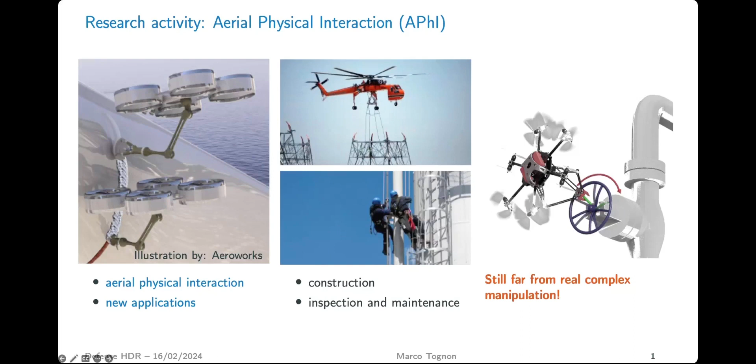So this field started about, let's say, 10 years ago, with the ambition of opening the door to new applications that require physical work at high altitude, like, for example, construction, inspection and maintenance, and others. But despite the work that a lot of researchers have already done, the very promising results that we obtained, and also the appearance of some first commercial solutions, we are still far from having aerial manipulators able to perform complex manipulation tasks in real environments.

But why is there still this gap between what an aerial manipulator can do and what a ground manipulator can do, which has been able to perform complex manipulation tasks for many years? Well, the very first source of challenges is the type of base. In fact, a ground manipulator is fixed to the ground, while on an aerial manipulator, the arm is attached to a floating base system, which is much more difficult to control.

Let's make an example. As soon as the arm moves, because of some dynamic reaction, there are some torques and forces that are applied to the base of the system. In a grounded manipulator, those forces and torques are passively, directly compensated by the reaction forces of the ground. While on an aerial manipulator, those reaction forces need to be actively compensated by the floating base. And this is very similar when the robot gets into interaction with the environment, so there are interaction forces applied to the end effector.

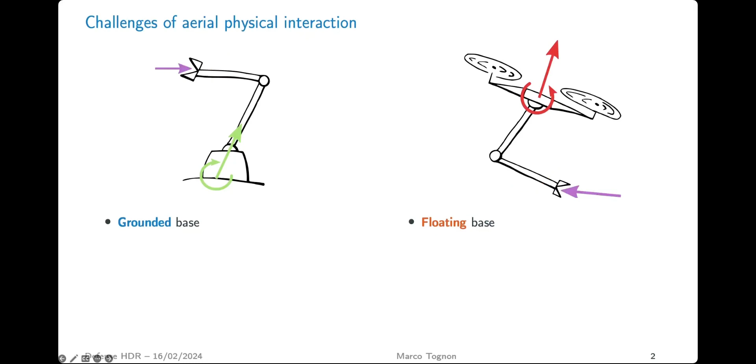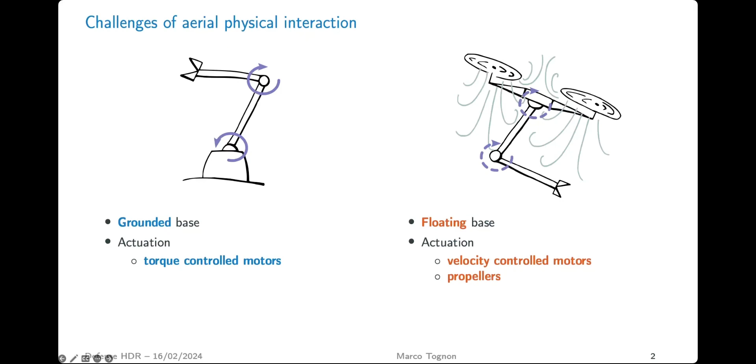The second source of complexity is the type of actuation. Grounded manipulators are normally controlled by very accurate torque-controlled motors. On the other side, on an aerial manipulator, we normally see inaccurate servo motors to control the arm, to make the arm lightweight. But not only this, the aerial platform itself is actuated by propellers that generate forces pushing the air. But due to turbulence and very complex aerodynamic effects that are difficult to model, the precise control of the force produced by propellers is very challenging.

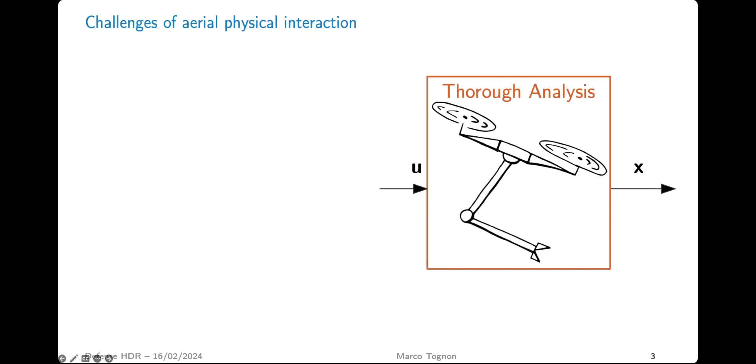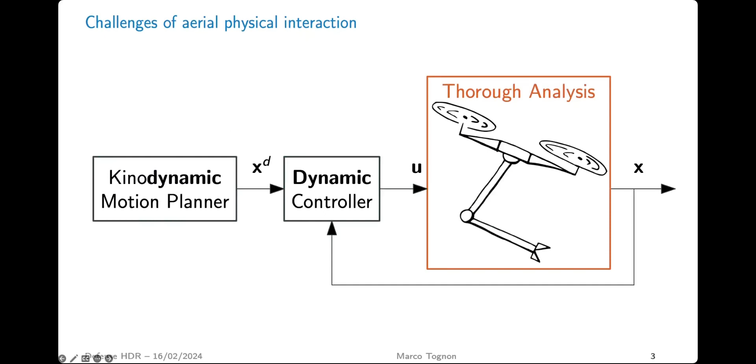Therefore, to address all these problems, I believe that a very deep and formal analysis of the dynamic properties and capabilities of those systems is required, to then be able to design new dynamic controllers and motion planners that can really perform well for physical interaction.

So my journey in the realm of aerial physical interaction started quite some time ago during my internship at the Max Planck Institute, where I first started working in robotics. There, fascinated by this domain, I decided to start a PhD at LAAS under the supervision of Dr. Franchi and Dr. Cortés. And at the end of this, I decided to stay at LAAS for another year and a half, more or less, to finalize some works, start new works through collaborations, and also some independent work. And also to improve my management skills, I stayed to be the technical leader of the LAAS team for the robotic challenge MBZIRC.

At the end of this, I moved to ETH Zurich in the ASL group, where I was the leader of the micro aerial vehicle team. And finally, in November 2022, I got a permanent position here at INRIA as an INRIA researcher within the Rainbow team.

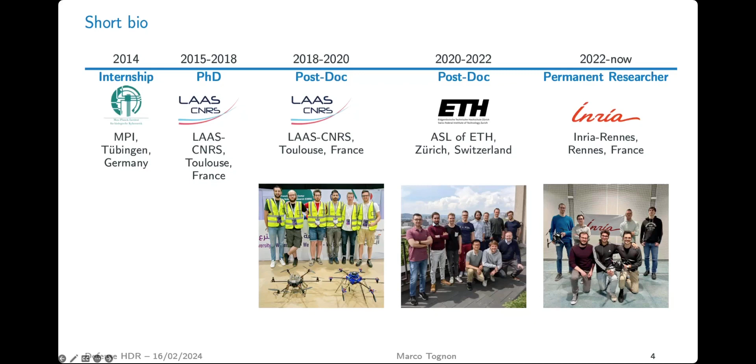So to start my journey, at the beginning of my PhD, aerial physical interaction was not that advanced, or actually the question was still if aerial physical interaction was even possible. That's why during my PhD, I started analyzing systems with always increasing complexity, starting with simple aerial manipulators with a passive link, like cables or bars, to then move to active links, where there are active manipulators mounted on either under-actuated or fully actuated aerial vehicles.

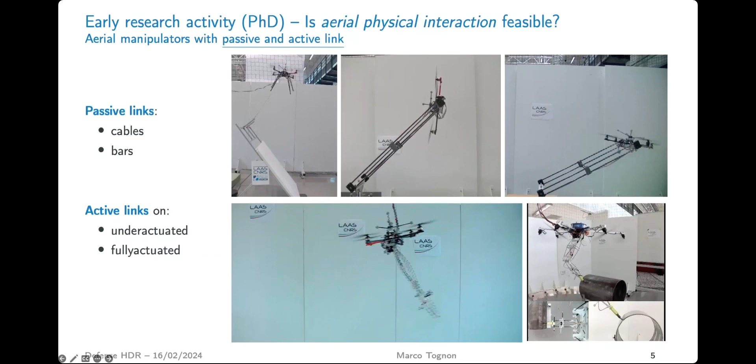So those preliminary results, let's say, were able to show how an aerial robot can actually interact physically with the environment. And thanks to those results, and of course all the work of other colleagues, I will say that after my PhD, the community managed to show the feasibility of aerial physical interaction, but mostly in indoor environments using motion capture systems, in very structured environments where the modeling is known, and also for very simple tasks like pick and place, or at best what we call push and slide on static surfaces.

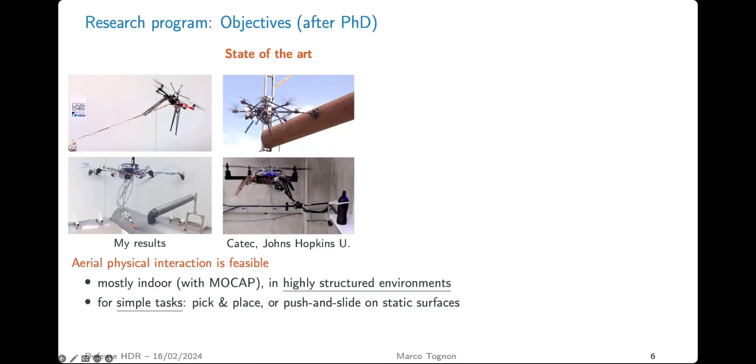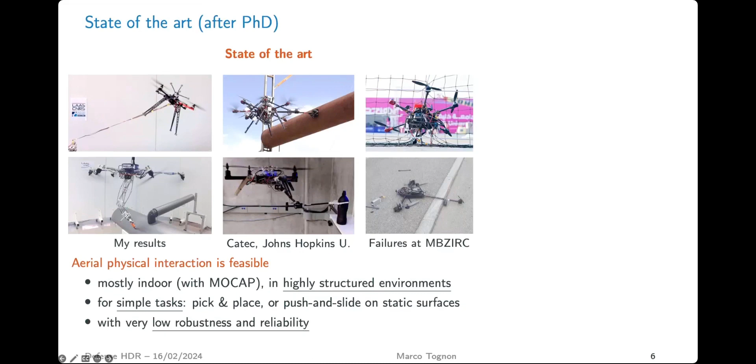But even in those very simplified conditions, as soon as there is additional sensor noise, disturbances, or uncertainties in the environment, performance and robustness can decrease drastically, often leading to the failure of the system, as we saw many times during the robotic challenge MBZIRC.

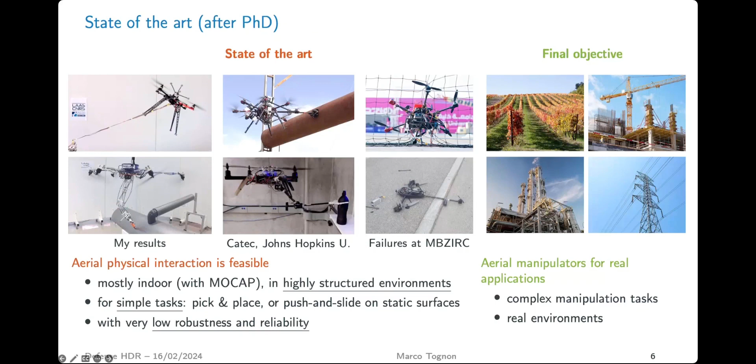Therefore, I believe we are still quite far from having real aerial manipulators that can perform complex tasks in a real environment. This is why at the end of my PhD, I basically took this as a main driving motivation and goal, which is designing aerial manipulators that can perform complex tasks, for example for precision agriculture, construction, inspection and maintenance, in real environments like oil and gas or power distribution plants.

But to reach this goal, there are still many gaps and challenges to be addressed. For example, considering single robot operation, aerial manipulators need to be very robust against uncertainties and disturbances, and able to not only interact with the static environment, but also with dynamic and articulated objects.

Although this is a must, for some applications it might not be enough. In fact, because of the complexity of some tasks, robots might need to collaborate with each other, so the task might require multiple robots to perform it, or even interaction with humans.

Therefore, my goal was to design aerial manipulators with enhanced aerial physical interaction capability to perform complex interaction tasks in uncertain and dynamic environments.

And to reach this goal, I started my investigation along three major axes of research. The first is precision, robustness, and safety of single robot operation. The second is the collaboration among multiple aerial manipulators. And finally, the third is the collaboration even with humans.

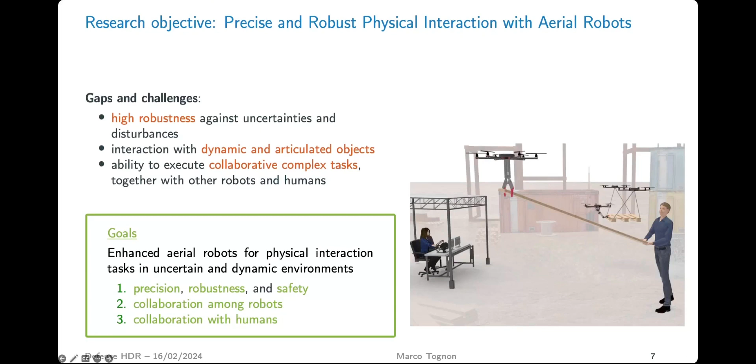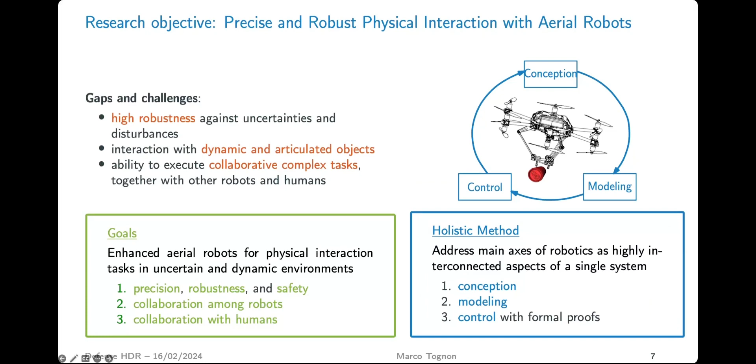To perform this research, I mainly based my work on what we call a holistic method, meaning that I try to address all the main axes of robotics not as independent modules, but rather as very interconnected aspects of a single system. Relying on my background, I mainly focus on the conception, modeling, and control of those systems, trying to provide a formal proof of stability and guarantees, but without completely neglecting the links with perception and motion planning. So the investigation of these three axes of research has been done in different ways along my career.

Specifically, the investigation about single robot operation has been done mainly at ETH Zurich, where I was leading the MAV team for this objective. On the other hand, the multi-robot aerial physical interaction investigation started at LAAS, also with Antonio, and then continued in collaboration with him and other researchers and students at LAAS and also University of Padua.

While the third research axis, about having aerial manipulators interacting with humans, was an investigation that I autonomously started, being really curious about the topic. So I independently started it at LAAS, and then instantiated it at ETH, where I also managed to get my own funding to continue this very interesting topic.

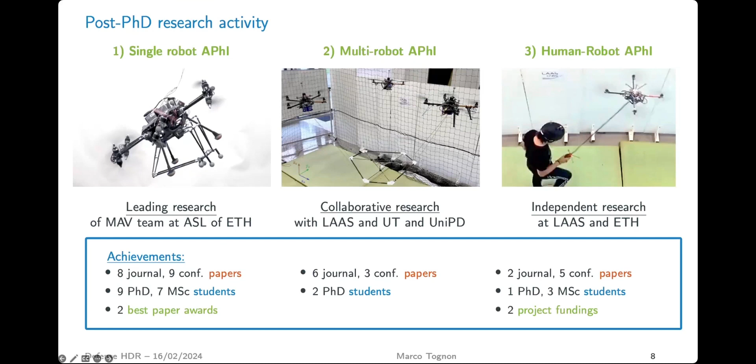So today I will try to provide a broad overview of all the work we have been doing along each axis, but because of the limited time, I will mainly go into detail on the first axis. So let's jump into this one, about improving the performance of single robot aerial physical interaction.

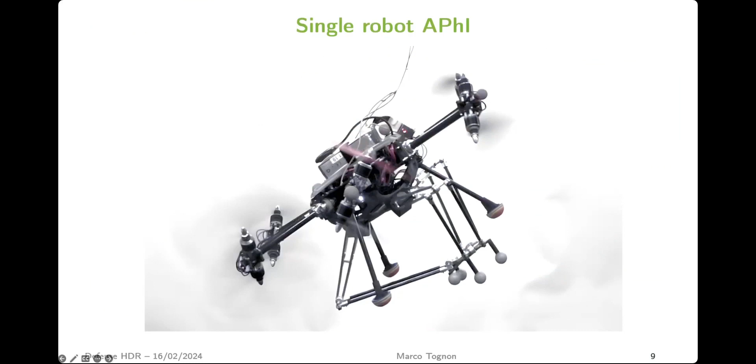The first goal was to improve precision, because even when we were using a fully actuated aerial vehicle, for example the one from ASL that is even omnidirectional, meaning it can exert forces in multiple directions while being able to also control position and orientation, we still have a minimum error of around 5 centimeters. This is due to the fact that there are many aerodynamic turbulences, unmodeled or uncertain modeling parameters that we cannot precisely compensate for.

So a solution for improving this precision, aiming at a precision below 1 centimeter, we started adding an active manipulator that can compensate for the oscillation of the robot. Specifically, we designed a delta arm, known for its precision, to drastically improve performance, going from a 5 centimeter error at the end effector to a 2 centimeter error. But this for us was not enough.

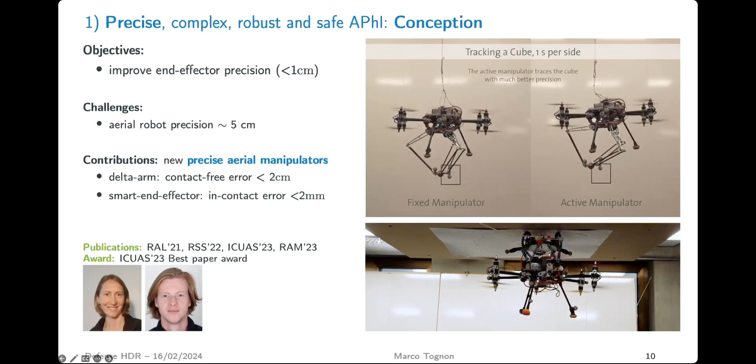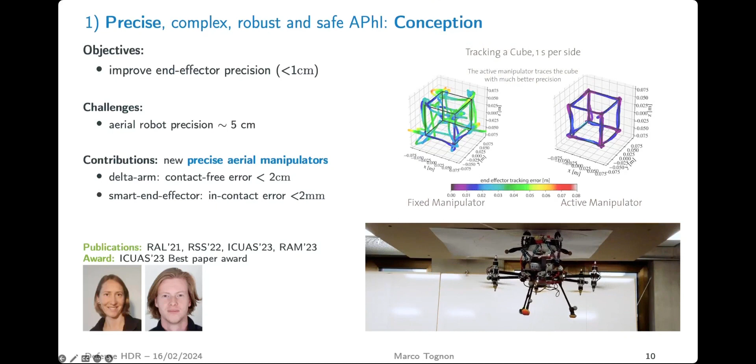We wanted to do even better, and being inspired by the fact that contacts actually bring stability during operation, we then designed what we call a smart end effector, composed of 3 omni wheels that guarantee stable 3 contact points with the surface. This end effector is then attached to the aerial platform with a compliant structure, and thanks to this smart end effector, we reached a precision below 2 millimeters.

So then let's move to see how we can actually control those aerial manipulators, especially for complex tasks.

One of our goals was to go beyond interaction with static environments, to actually manipulate dynamic and articulated objects. Now we don't only have to face challenges from the complex dynamics of the robot alone, but also from the environment. We have to account for the dynamics of the environment, and while these two dynamic systems interact, we always have to preserve stability, which is a non-trivial problem.

For interaction with articulated objects, we can only find a few works addressing this problem. Those are either based on heuristics, like a pre-planned trajectory, or on MPC methods, model predictive control, which are anyway based normally on a rigid grasp or the assumption of a very stable contact. So these proposed solutions end up being ad hoc, designed specifically for one task or one object to manipulate.

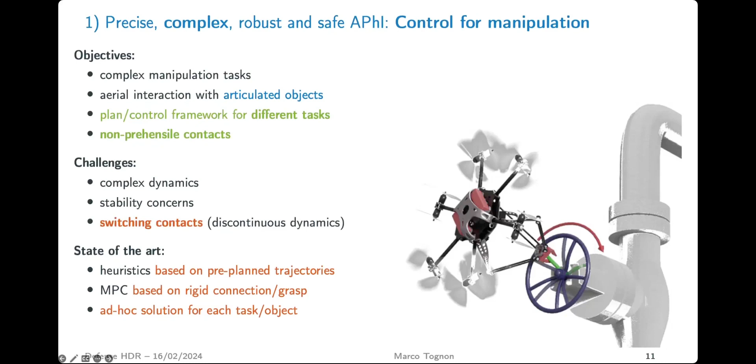On the other hand, we foresee a more general framework that can be used for different types of tasks and relies only on non-prehensile contacts, which introduce some discontinuity in the dynamics because of their switching nature. Because of this, we cannot easily consider them in standard MPC approaches.

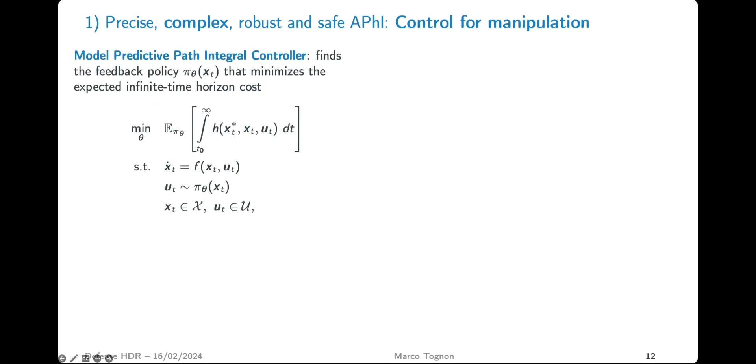Our way was instead to rely on what is called Model Predictive Path Integral Control, or MPPI controller, which is basically a sampling-based version of an MPC controller that tries to find the feedback policy pi minimizing the expected infinite time horizon cost. Practically, how it works is we sample a sequence of inputs over the time horizon through a certain probability distribution, and then forward simulate those inputs according to the dynamics of the system.

We repeat those simulations in multiple parallel simulations called rollouts to compute the cost of each rollout. Then we take the input that leads to the minimum cost, send it to the robot, and repeat the same process over and over at every optimization step.

One very good property of this is that we don't need the differentiation of the dynamics anymore. We just need to be able to forward simulate the sampled input. Thanks to this, we can just use a physics engine, which simplifies the simulation of contacts, whereas this would not be possible with a standard MPC.

On the other hand, we have to simulate the full system multiple times in real time, and this increases the computational cost, decreasing the frequency of the controller. In fact, it is impossible with this technique to directly control each propeller of the robot, so we cannot directly control each actuator.

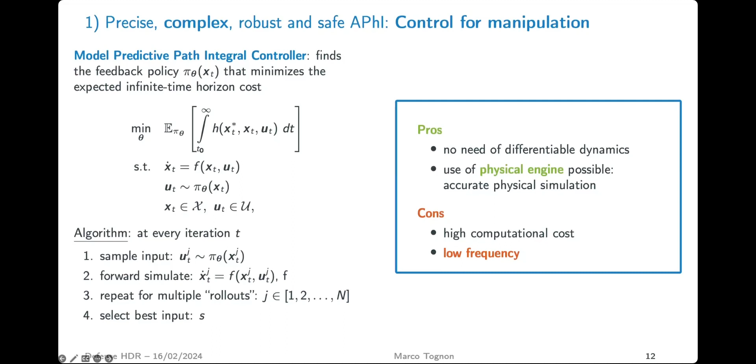So how to deal with this: we proposed a cascaded approach. We relied on a first low-level controller, an impedance controller, which in practice makes the aerial manipulator stable and at the same time compliant with the environment, making the system look like a second-order system. We then used the MPPI strategy as a higher-level controller, which can use the simplified closed-loop dynamics of this second-order system and reach a good frequency, acting not as a direct controller, but rather as a trajectory generator for the low-level controller.

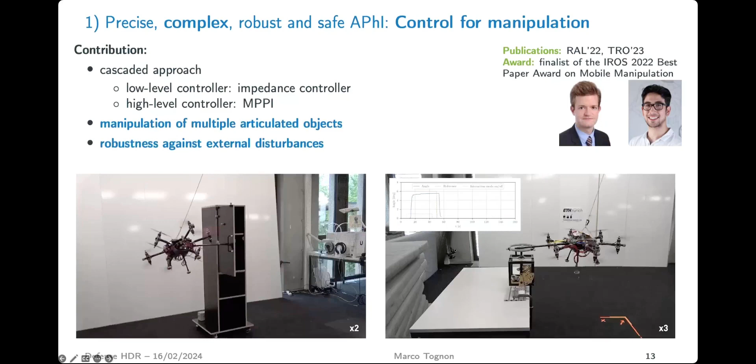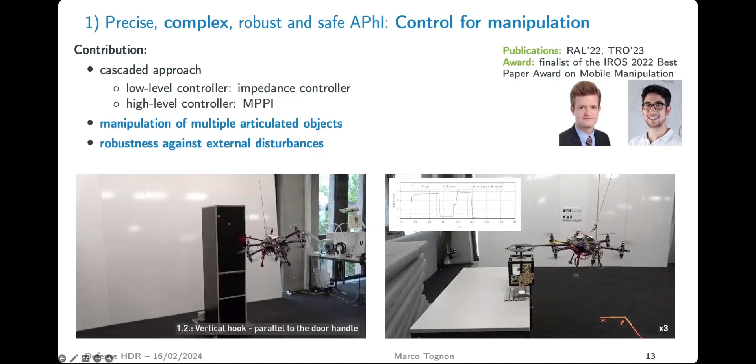Thanks to this approach, we managed to provide a framework that allows the robot to manipulate different types of objects. Here you can see two examples where we open a door or open a valve with minimum engineering effort, because we just have to change the simulation environment, and we don't have to change our framework at all.

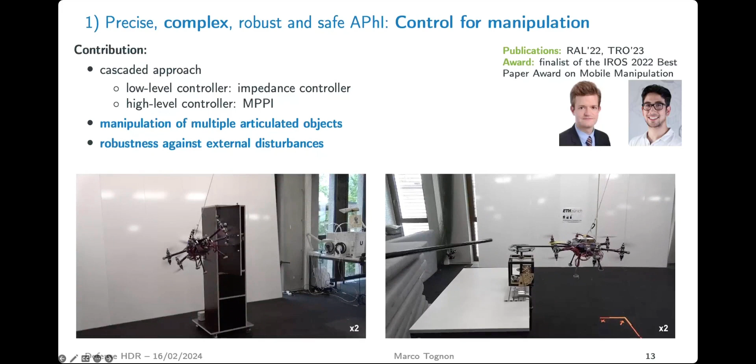Because the higher level controller replans the trajectory online, we also get this replanning feature that allows the robot to be compliant to external disturbances, but also able to resume the task as soon as these disturbances go away. Well, so far it looks very great.

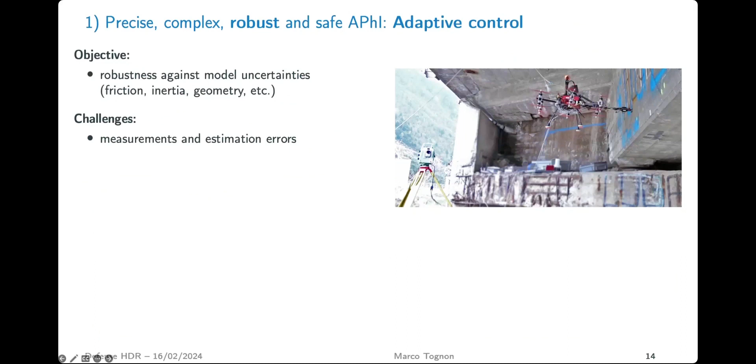We can achieve a very amazing task, but this only works when the environment is very precisely known. Because of noisy measurement or error in the estimation, this doesn't work in the real field. We have to consider, for example, friction coefficients, inertia parameters of the environment, or geometric parameters that are instead unknown.

In the literature, one very powerful tool to address these problems of uncertainty in the model is adaptive control. The principle is basically to keep the same controller, but find better suited parameters or gains of the controller that better adapt to the current situation, done by inferring directly from the sensors.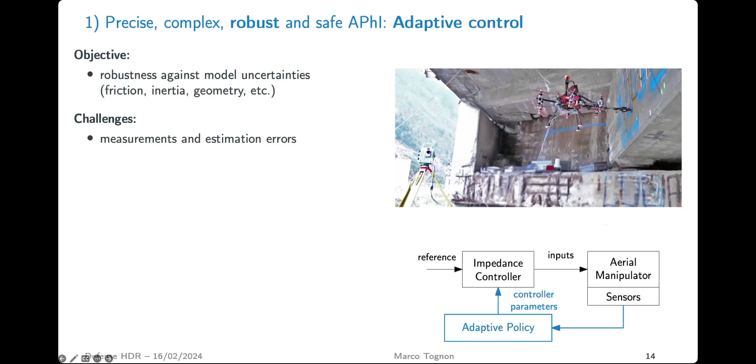Taking as an example the problem of sliding the end effector along an unknown surface, finding a policy that directly determines the optimal gains from the sensor is a very complicated problem. So what we instead thought to rely on was learning. We hypothesized that a learning-based network can somehow learn this adaptation policy directly from sensor input to the gains of our controller.

In specific, we use reinforcement learning with a methodology called teacher-student policy that works in this way: first, we train in simulation a teacher network that learns how to adapt the gains of the controller when the full parameters of the environment are known.

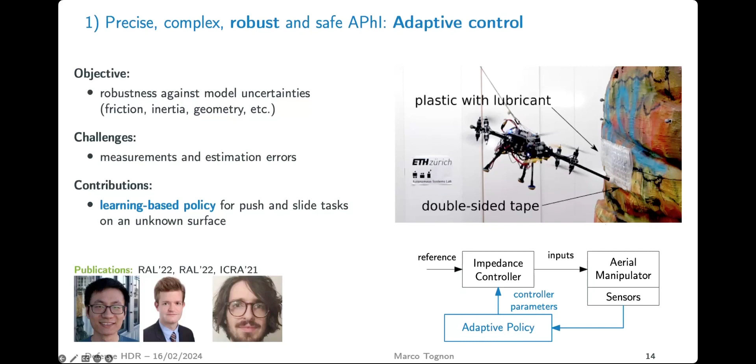The teacher knows everything about the environment and just needs to find the optimal gain for the controller. On the other hand, we then train a student network that will be deployed on the robot, trained to imitate the teacher but only having access to real sensors, which in our case are the camera and a force torque sensor at the end effector. We show that this approach can lead to much better performance when, for example, we try to slide an end effector along a very cumbersome rock-like surface whose geometry and friction coefficient are unknown.

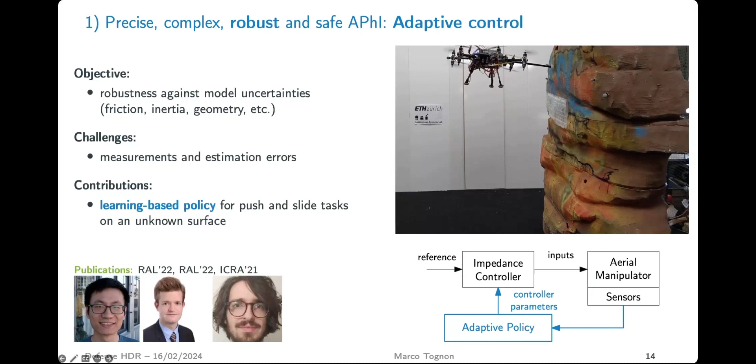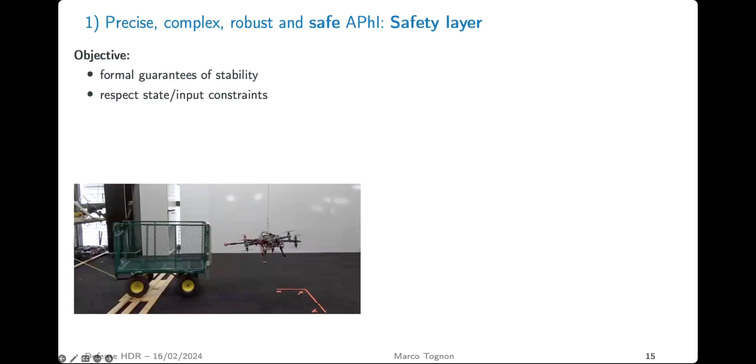But there is still a very important point to be addressed in robotics, which is safety. Even though our robots can do very amazing tasks, we need to provide some guarantees of safety. In our case, safety means being able to provide guarantees of stability and also respecting some input or state constraints, like input limitation or obstacle avoidance.

Regarding stability, a very powerful tool to prove the stability of a dynamic system is passivity. This is a mathematical tool that looks at the robot and the environment as two dynamic systems exchanging energy with each other. Looking at the autonomous system, the combination of both robot and environment, we can say that a system is passive, and therefore stable and safe, if the total energy of the system does not increase. With the type of object we are interacting with, we can assume that the environment is passive, so it doesn't create energy in the system.

But on the other hand, we cannot directly say this for our controller. The controller, and specifically the adaptive strategy that I just presented before, is a non-passive action. So it can actually lead to an increase of the total energy of the system, and therefore to the destabilization of the overall system.

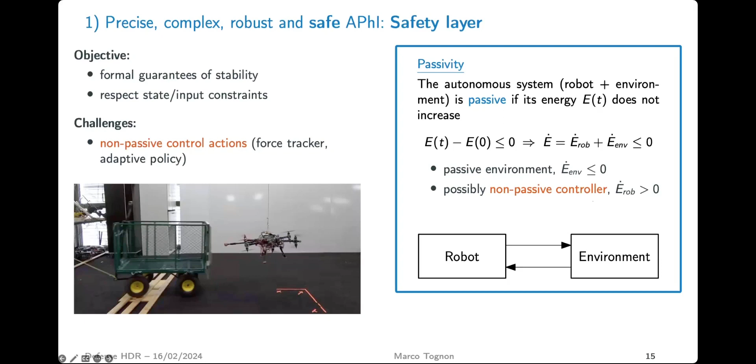So how to address this without changing the full framework that I presented before was to introduce this safety layer. What we want is basically to find a new control input U hat that is the closest to the nominal input U provided by our controller, but that still ensures the stability and safety of the system.

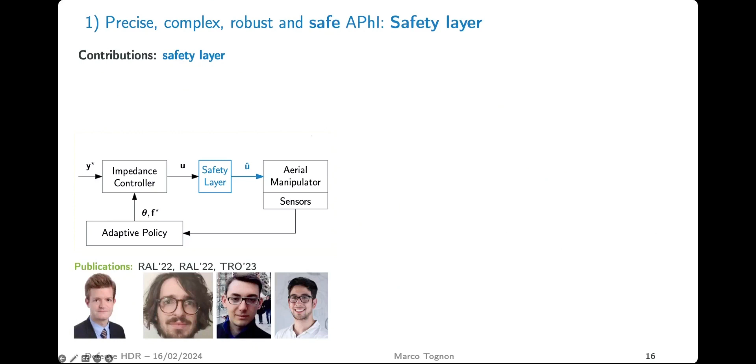To do this, we combine two methodologies: energy tanks and control barrier functions. Let's start with energy tanks. This is another mathematical tool that introduces a virtual storing element, a storing energy, in the system.

Now basically the total energy of the system is the robot, the environment, and also the tank. The energy that we start with in the tank, and can even accumulate, is used to compensate for the non-passive actions of the controller in order to make the overall system passive. But of course, this can work only if there is energy in this tank.

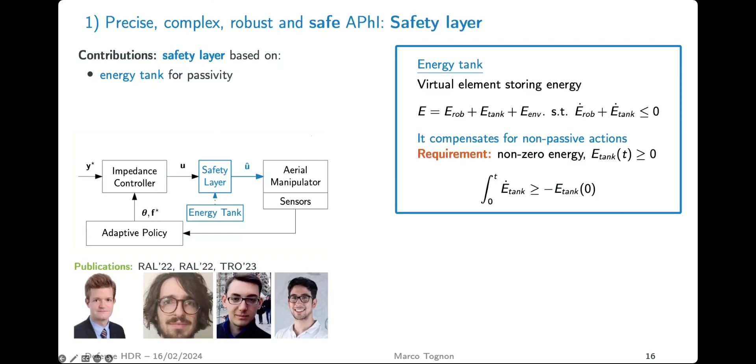So therefore, we now have a new constraint: the system must not deplete all the energy that is in the tank. This new stability constraint, plus all the state and input constraints, basically defines what we call a safety set—a subset in the state space where we would like the system to always stay.

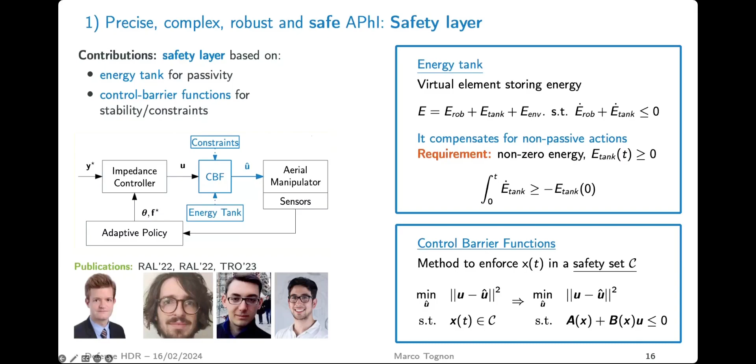In the specifics of this safety layer, we would like it to find a new input U hat that is the closest to the nominal one, but which keeps the system in this safety set. In general, this problem is very complex to solve, but by using control barrier functions, we have a way to transform this constrained optimization problem into a QP problem, which is much simpler and faster to solve.

And here you can see how this safety layer works in a practical example. Here we tested it on a ground manipulator, but it could also be applied to our aerial manipulator. In this specific case, we are applying the same MPPI strategy, but here on a grounded manipulator.

So in this task, the robot will try to open this door, but inside the door there is a little rope that, while the door gets open, will get taut and so make the door not possible to open fully, and this the robot doesn't know.

Without using the safety layer, the robot tries to open the door, but when this rope gets taut, the robot, since it doesn't know, will try to push and push more to make it open, basically at a certain point violating the passivity, reaching the point at which the robot is almost letting the full furniture fall down, and at a certain point even breaks the cable, and the human needs to intervene to stop everything in order to bring back the system to safety.

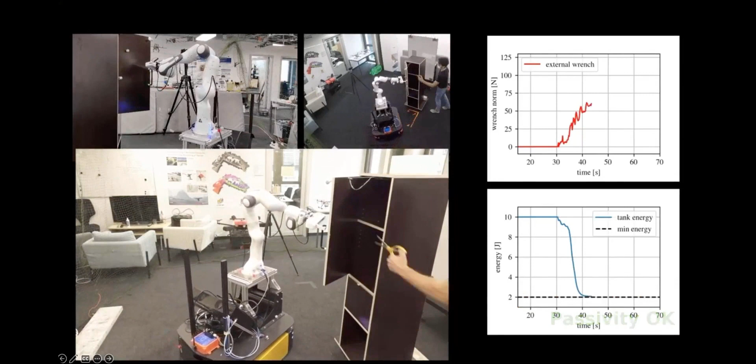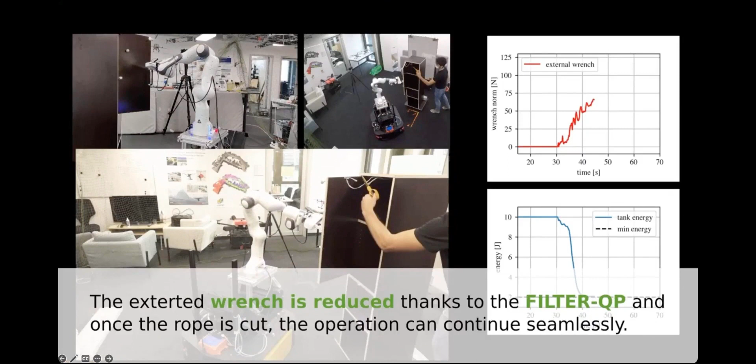On the other hand, when we use this safety layer, you will see that as soon as the robot reaches this constraint of the door, the energy starts to be depleted, but as soon as it gets close to this limit, the safety layer limits the interaction force and preserves the stability of the system, making the full operation very safe. And once the operator cuts this little rope, the robot can resume the task in a very safe way.

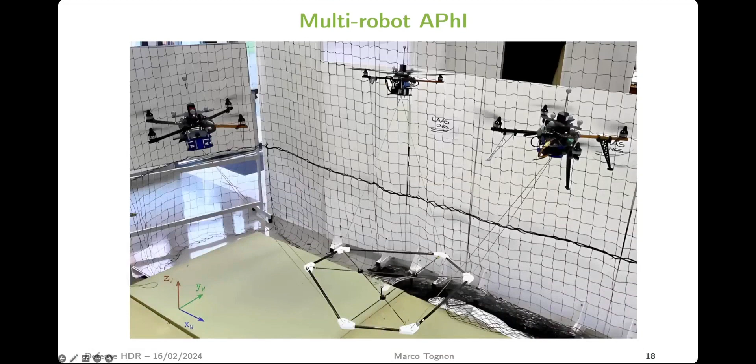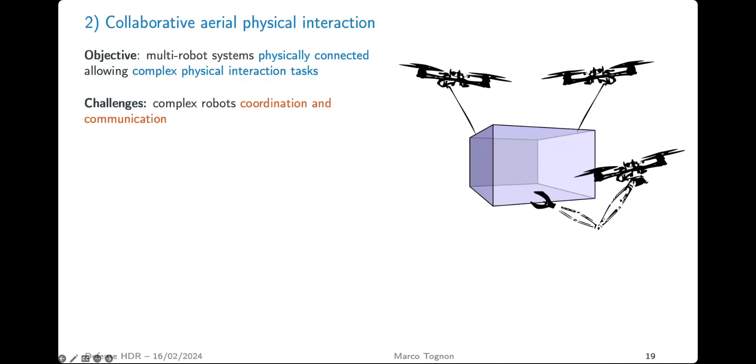So this work showed a very complete system for single robot operation. But then I also tried to investigate how multiple robots can physically interact with each other. In the specific case, I tried to design a multi-robot system that is physically connected with each other, able to perform complex physical interaction tasks. Here, not only do we have to deal with all the challenges of single robot operation, but also with the additional one related to the complexity of the coordination and communication between the robots.

For those, we designed different types of control methods, in the particular case to manipulate cable suspended loads. And for this we focus on centralized position and compliant control strategies that allow us to perform tasks like pick and place and assembly of some object.

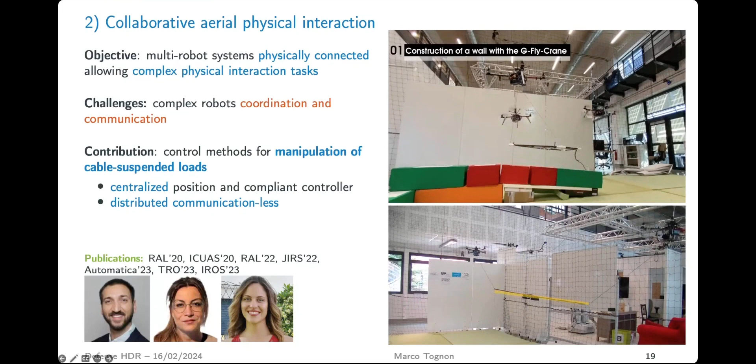But we also tried to investigate how to decentralize those strategies without the use of communication at all, using instead forces as an indirect communication channel between the robots. And then let me briefly introduce the work that we have done on the topic of human-robot aerial physical interaction.

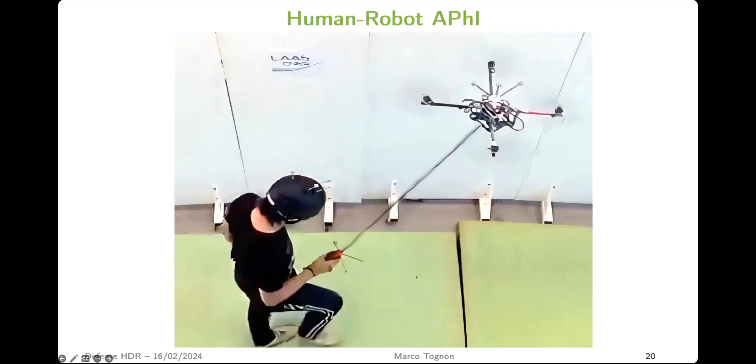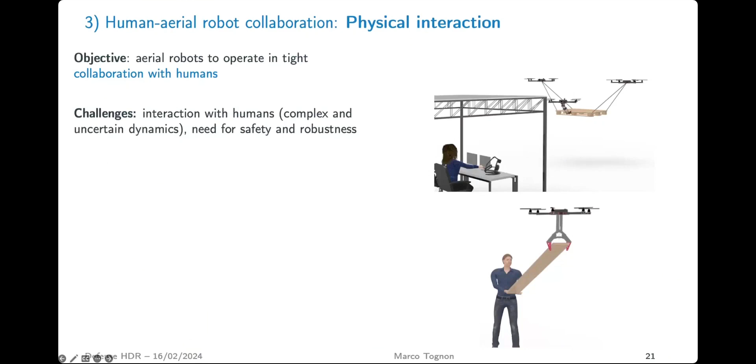This topic is very poorly addressed in aerial robotics, most likely due to the complexity of the problem, because now the robot not only has to interact with humans, who are a very complex and uncertain dynamic system, but we also have an extra requirement for safety and robustness.

Due to this gap, I really tried to investigate this topic, trying to address probably one of the first systems in which an aerial robot is tightly physically coupled to a human. In the specific, we have an aerial robot that is connected by a rope to the hand of a human, and we want the robot to be able to guide the human using only forces as a communication channel.

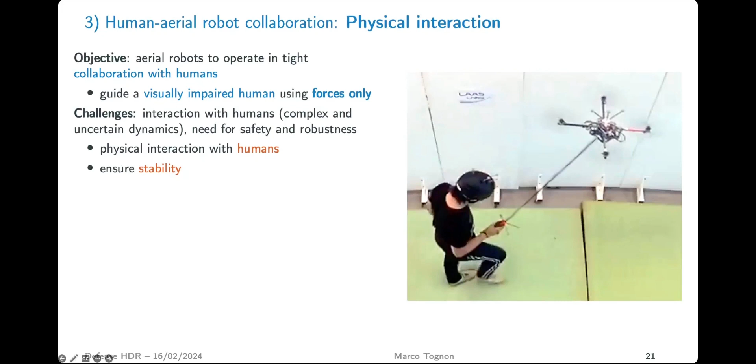So you can immediately see that a possible application could be, for example, to guide a visually impaired human along an uncertain environment. So here the challenges again are the new physical interaction between the robot and the human, and also this extra need for safety and stability.

To address this problem, we design an admittance control framework that makes the robot able to be compliant to the physical interaction with the human, but also allows us to control the force that the robot is applying, thanks to the rope, to the hand of the human.

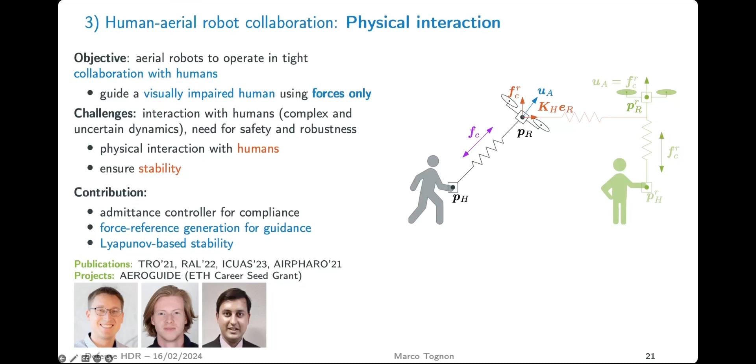On top of this, we design a force reference generator that basically decides which is the best force the human should feel to guide them along a desired path. And since for us giving proof of stability was one of the requirements, thanks to this approach and a specific modeling of the system, we managed to provide the proof of stability and robustness using both Lyapunov theory and passivity theory.

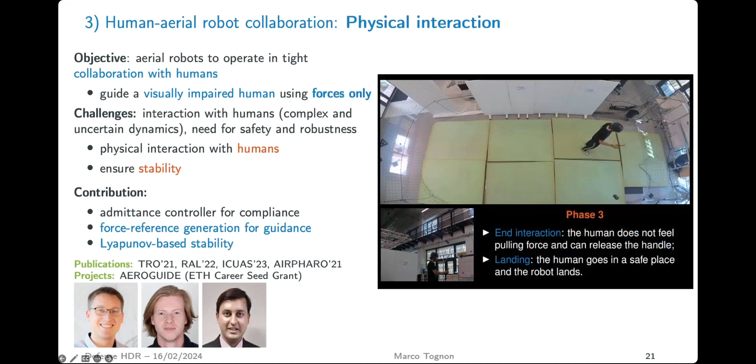Here is how the system works. You can see that the robot is able to pull the human along this desired trajectory, visualized here in orange, which is not known by the human. The human is not blinded for safety reasons, but we ask him to only look at the ground and not at the robot. At the end of the trajectory, the robot will place itself on top of the human, making him understand that the task is over and he has arrived at the destination.

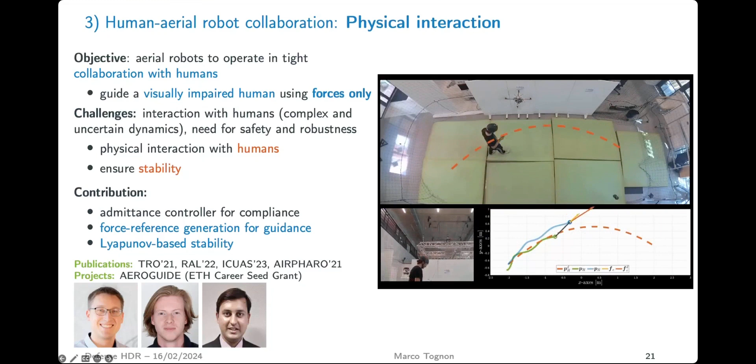So in this first part of the talk, I presented all the work that we have been doing, trying to improve the manipulation capabilities of aerial robotics. But of course our job is not done yet. There is still a lot of work to be done in order to bring aerial manipulators into real environments and finally achieve the final goal.

And therefore, in the next part of the talk, I will show you how I intend to continue my investigation toward this goal, still following these three major axes of research.

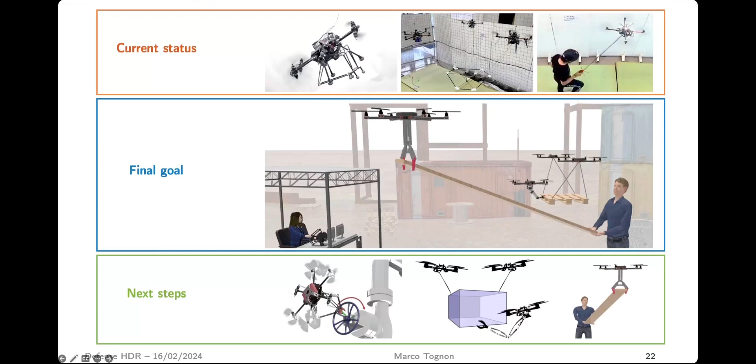Starting from single robot operation, what we reached so far is the capability to perform complex manipulation tasks, but with pretty low robustness and in a very controlled environment, always using the motion capture system. So the next step will be to relax this strong assumption, trying to design new methodologies for reliable complex manipulation in a real environment.

For this, I will address the problem in a twofold way. From a low-level point of view, we want to conceive a new aerial manipulator that, instead of having kinematically controlled motors at the arm, replaces them with torque control motors in order to compute truly full body controllers that also allow multitask optimization.

From a high level point of view, we would like to include much more perception into the framework I just presented, both visual and haptic feedback. We would like to include cameras, but also skin-like sensors at the end effector, in order to provide not only vision but also the haptic sense to the robot.

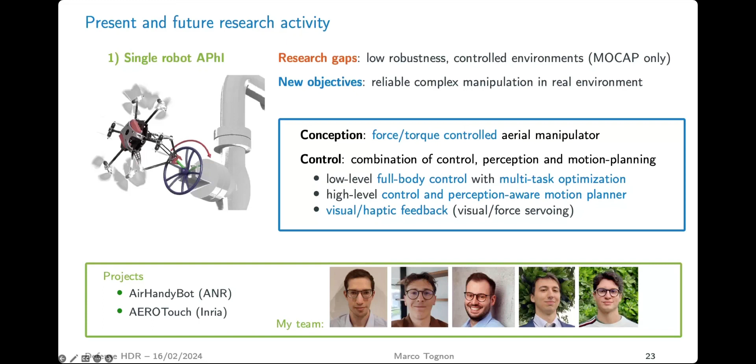This investigation will be carried out in the two projects I got last year. One is called AirHandyBot, a national project, and the other is called AEROTouch, an Inria project. We would also like to move toward multi-robot aerial physical interaction.

The work done so far basically shows that we can do simple transportation tasks, again using mostly centralized methodologies. So in the next step, I will try to bring this capability of interacting with dynamic and articulated objects also to the multi-robot scenario, extending these strategies in a decentralized sense and using onboard sensors.

For this, we will investigate the use of, for example, distributed optimal control, applied both from the control point of view and also from the estimation point of view.

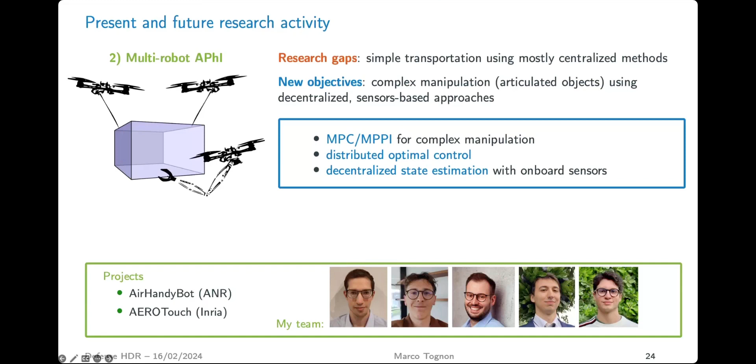Last but not least, regarding human-robot interaction, the work done so far mainly covers a very simple task: the guidance of a human, where only the robot is an active agent, while the human in this specific case was only passive.

In the next step, we would like to focus on more collaborative tasks where the two agents, robot and human, are both active, for example for collaborative transportation.

Not only this, but we would like to include much more human factors in our framework. We would like to rely on the optimization-based strategies I presented before to include the human model, but also the capability to detect and react to human intentions.

Along all this, we will have to focus also on providing guarantees of stability, both from the control point of view and also from the design point of view.

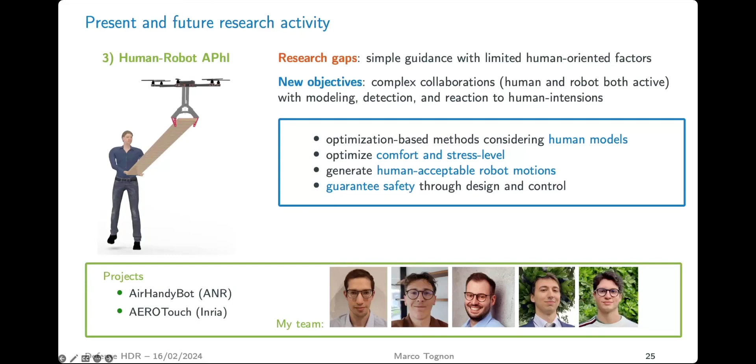I really believe this investigation will lead to the next generation of aerial manipulators, bringing manipulation capabilities to the next level. I'm very happy to be at such a particular and enthusiastic moment for aerial robotics, because there are plenty of new ideas and projects going on, and I'm happy to be part of this community that is pushing hard the scientific and technological boundaries of aerial robotics, to one day have aerial manipulators in our daily life.